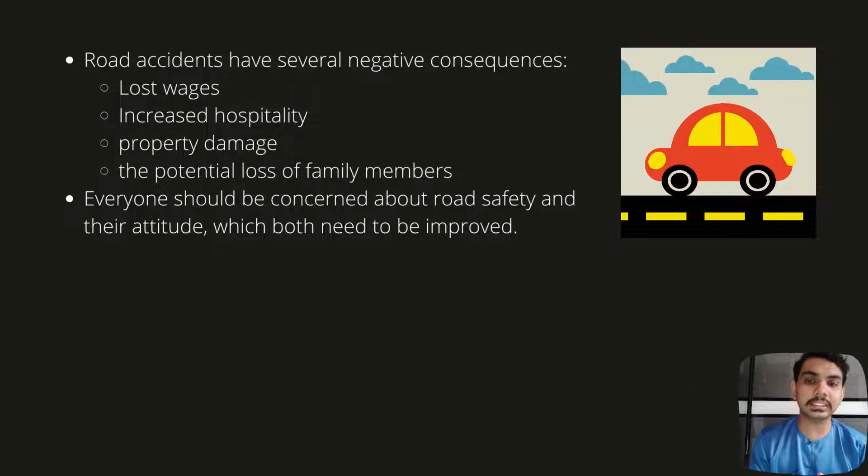In 1999, 223,116 people were involved in traffic accidents, with about 6,000 of them dying. From these words, we may deduce that everyone should be concerned about road safety and their attitude, which both need to be improved. In Malaysia, the number of traffic accidents has risen. In 1966, there were 248 road accident case records for every 10,000 automobiles that had a license. In 1995, this number had risen slightly to 268 road accidents per 10,000 vehicles.

There has been a lot of work put into reducing road accidents, including physical road repairs, vigorous driving laws, and safety first campaigns. Unfortunately, no amount of effort was successful in reducing traffic accidents. Drivers are responsible for 38.6% of these violations, 50.2% are negligence, 7.9% turn on the highway dangerously, 4.7% violate the speed limit, 4.6% cut other vehicles dangerously, 3.1% drive dangerously, 2.6% follow too nearly, and 0.55% are not obeying street lights.

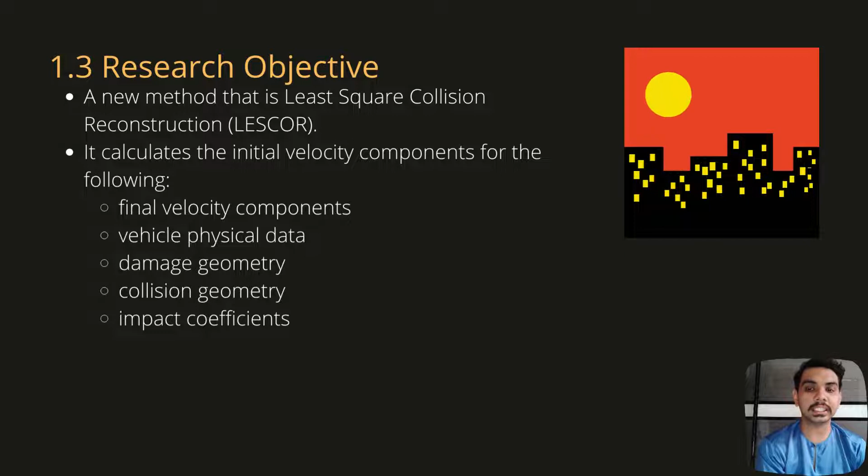A new method can explain the difference between two collisions based on all these problem statements, the two colliding objects. Least squares collision reconstruction is the method, LESCOR. It calculates the initial velocity components from the following: final velocity components, vehicle physical data, damage geometry, collision geometry, and impact coefficients, that is restitution and friction. LESCOR determines any combination of 6 or less unknown beginning velocity components and impact coefficients using a 6-equation impact model and the least squares approach.

Accident collisions between moving things and other moving objects and vehicles are seldom without controversy. An accident reconstruction is performed when the circumstances call for a formal investigation. This study is concerned with the dynamics of a reconstruction, specifically the determination of velocity changes that occur through the time span when the vehicles are in touch. If many impacts occur, the procedure can be performed repeatedly to investigate each one in turn. If the vehicles are articulated, a new impact model must be employed.

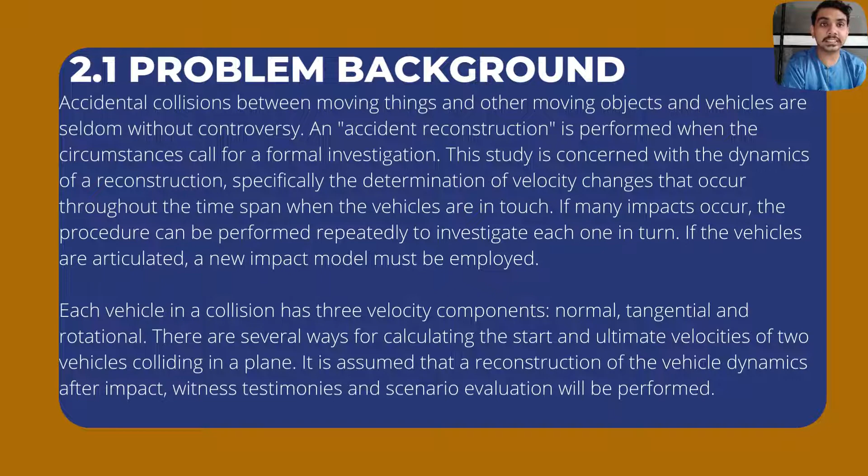Each vehicle in a collision has 3 velocity components: normal, tangential, and rotational. There are several ways for calculating the start and ultimate velocity of two vehicles colliding in a plane. It is assumed that a reconstruction of the vehicle dynamics after impact, witness testimony and scenario evaluation will be performed. The approach given uses the well-known least squares method to identify a combination of uncertain beginning velocities and impact coefficients that satisfy the 6 impact equations and nearly match the required final velocity components. The approach under development will be referred to as LESCOR throughout this work.

Vehicle collisions are an extremely non-linear transient dynamic process. Material non-linearity is affected by several elements, including deformation rate, temperature, pressure, humidity, material age, and deformation history. Although the use of models helps to reduce the reliance of automotive design on physical crash test data for determining parameters and injury values to occupants, it did not fully replace real-time tests due to certain unavoidable assumptions that limit detailed analysis of the event kinematics.

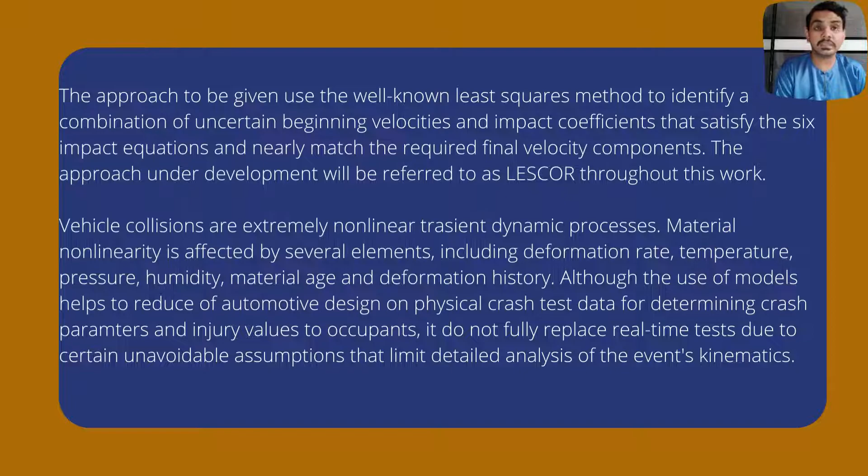Every genuine collision results in a loss of kinetic energy. Vehicle crashes are no exception, with normal numbers ranging between 25% and 98%. Impact models use coefficients or velocity limitations to indicate energy loss. The coefficient of restitution is a traditional coefficient used in introductory dynamics textbooks to simulate energy loss owing to material deformation in a normal or perpendicular mode to the crush surface.

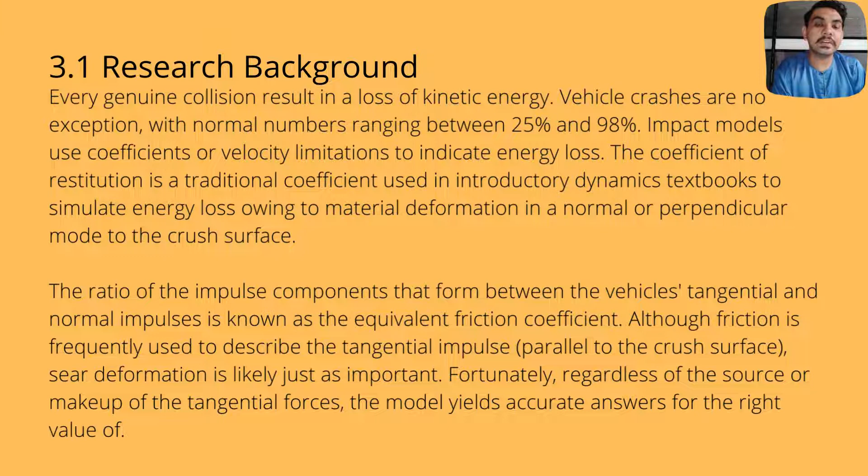The ratio of the impulse components that form between the vehicle tangential and normal impulses is known as the equivalent friction coefficient. Although friction is frequently used to describe the tangential impulse, shear deformation is likely just as important. Fortunately, regardless of the source or makeup of the tangential force, the model yields an accurate answer of the right value.

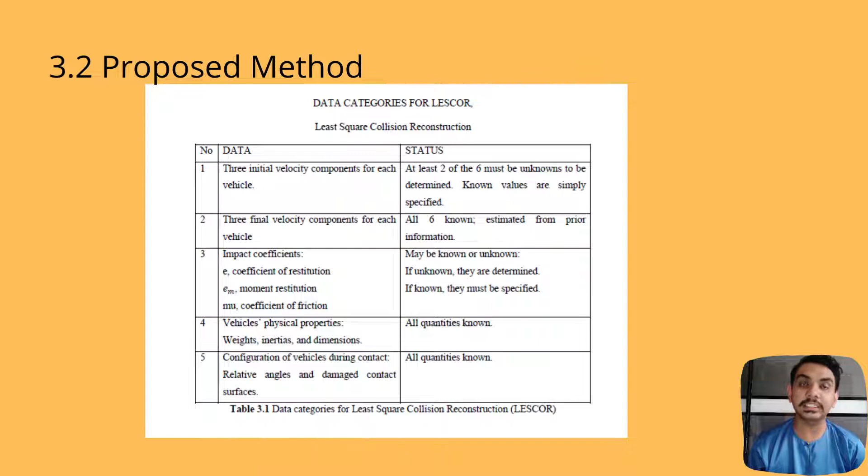For the proposed method, there are the data categories for LESCOR. So there are 5 data categories. 3 initial velocity components for each vehicle: at least 2 of the 6 must be unknown to be determined, and known values are simply specified. 3 final velocity components for each vehicle: all 6 known, estimated from prior information. Impact coefficients may be known or unknown. Vehicle physical properties, that is weight, inertia, and dimensions, all quantities known. And lastly, configuration of vehicles during contact, that is relative angle and damage contact surface, all quantities known.

For the formulation of the least square problems, a group of 6 or fewer of these 9 quantities are chosen as the unknowns. The conservation of momentum and friction laws may or may not be satisfied by this set of facts taken as a whole. However, for the given set of end velocities, there is a set of beginning velocities and impact velocities that match to an accurate solution of the impact equations.

For these beginning velocities, it is frequently possible to just solve the impact equations backward. The 6 final velocity components that fulfill the impact equation are based on equation 3.1. So for equation 3.1, the 6 final velocity components that will fulfill the impact equation are represented by Vi, and Vij is one of the Ni estimates of Vi. Many estimates are allowed, but normally Ni is equal to 1. There is a weighting factor that is Wi.

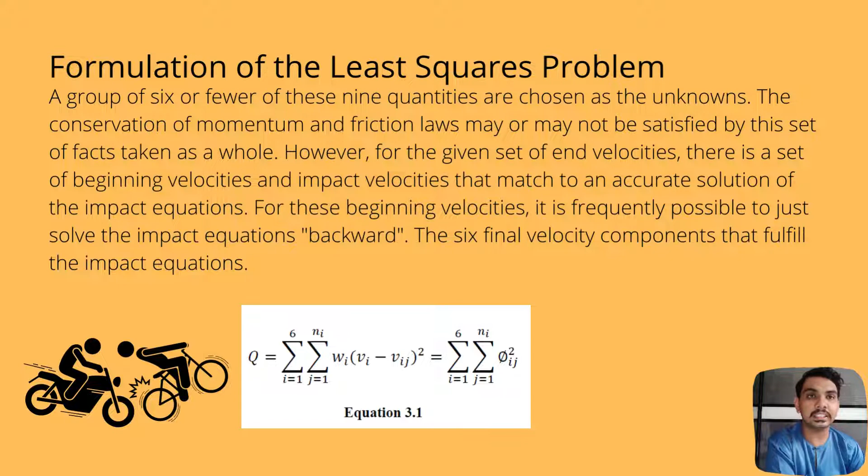LESCOR strategy is to determine the unknown beginning velocity components, unknown impact coefficients, and a set of end velocities that minimize Q and satisfy all of Newton's laws, notably the 6 impact equations. The usage of a digital computer is required due to the intricacy of the problem. For the supplied velocities and all other data, the impact equations are utilized to solve for a beginning set of initial velocities. For solving the least square issue, there is a well-known iterative approach based on equation 3.2.

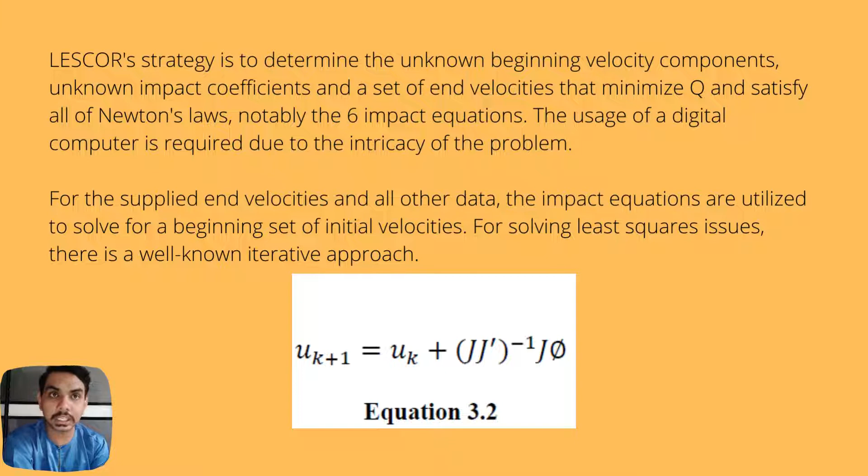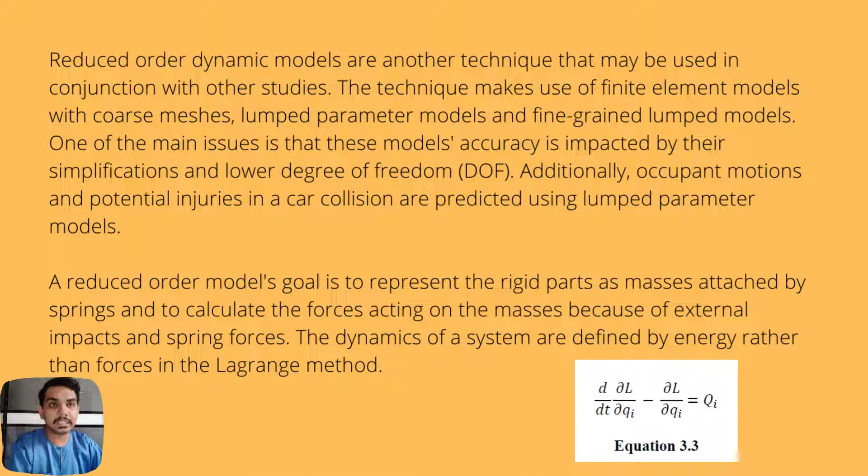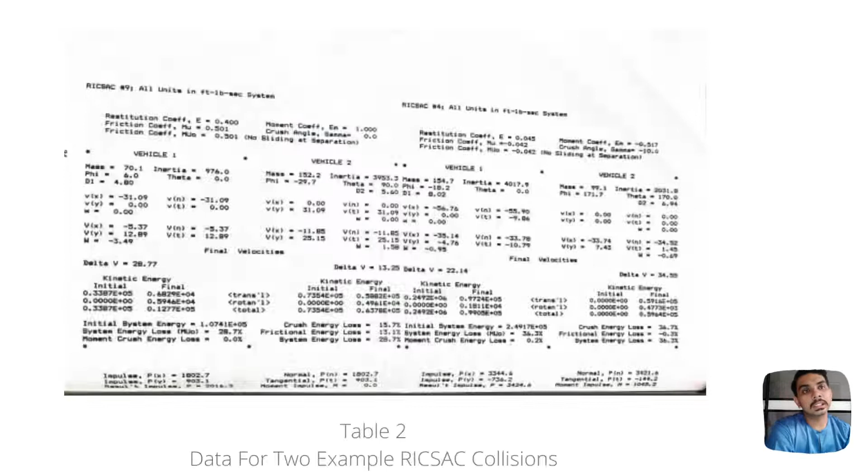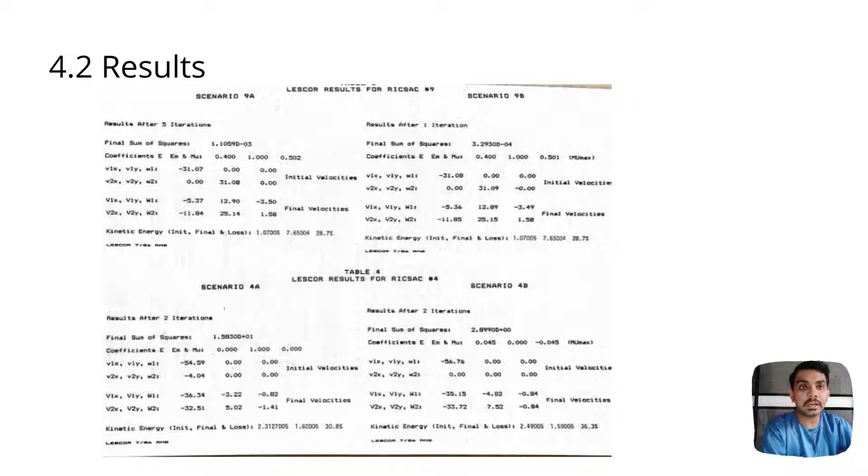For the result, we got the data for the LESCOR result for RICSAC. And for the additional result, we use the trial and error reconstruction of a side swipe collision, and also the LESCOR result for a side swipe collision.

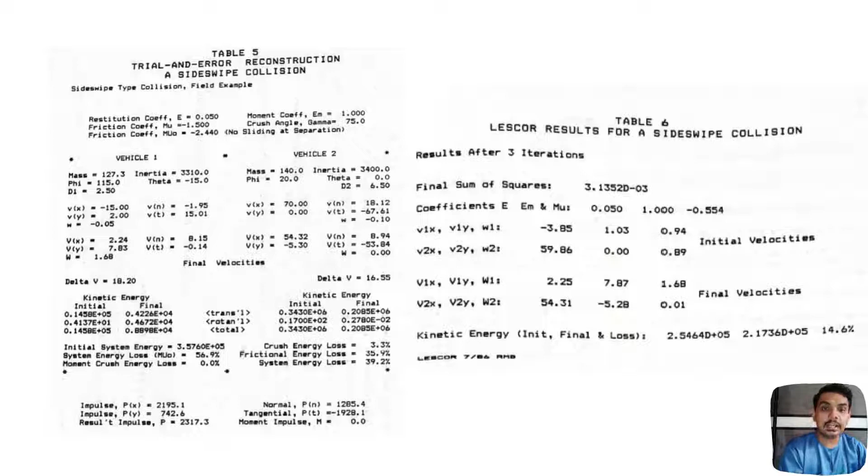For the research outcomes of the conclusion, after experimenting with the steepest descent approach, the Gauss iteration procedure was selected. Using most of the input data and an inverse solution of the impact equations, an algorithm was created. The initial inverse solution procedure selects the coefficients that provide an acceptable inversion, since final velocities must all be given. The least square collision reconstruction technique is a crucial tool for accident reconstruction. The least square reconstruction yields far less subjective results than trial and error techniques, while not all judgment is eliminated. The least square approaches are also significantly faster than trial and error techniques.

For the contributions to knowledge, the components of road safety may be achieved by driving abilities and competencies, action while driving and after driving, and raising knowledge of risk and safety. The most crucial feature is that all the aspects work together to raise awareness and help all drivers become more cautious drivers. Driving institutes and schools should periodically update and develop the quality of their teaching and teaching materials to guarantee that they are effective, particularly in creating sensible drivers.

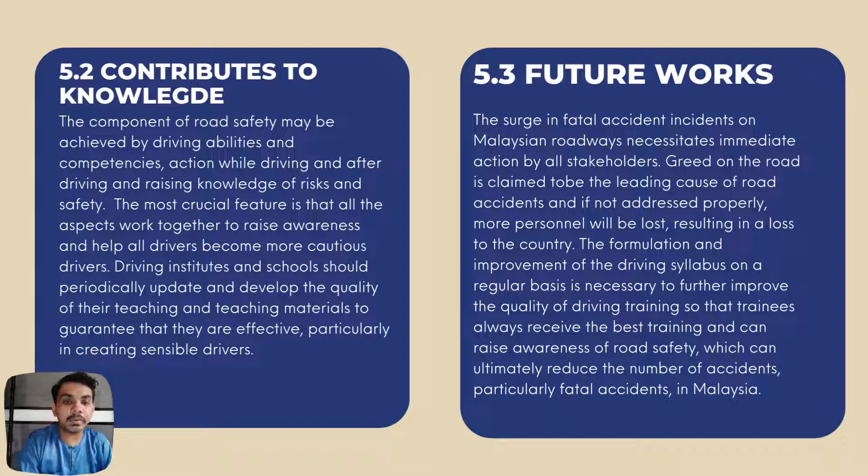For future works, I hope that the surge in fatal accidents on Malaysian roadways necessitates immediate action by all stakeholders. Greed on the road is claimed to be the leading cause of road accidents, and if not addressed properly, more lives will be lost, resulting in a loss to the country. The formulation and improvement of the driving syllabus on a regular basis is necessary to further improve the quality of driving training, so that trainees always receive the best training and can raise awareness of road safety, which can ultimately reduce the number of accidents, particularly fatal accidents in Malaysia.